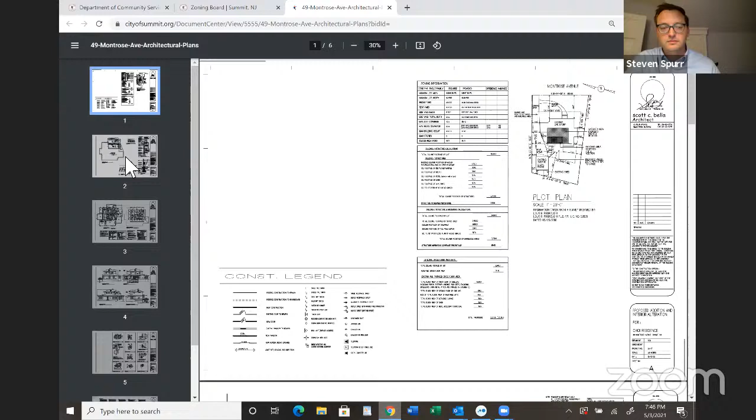So, Mr. Bella, if you want to take us through each of the floors and get an idea of what you're going to do to each one. Okay, so if you could move on to the next page, this is the crawl space and not much to speak about there.

Okay, so if you look at this page, what you see on the left-hand side is the first floor plan existing plus the proposed new. And if you look on the left side of the drawing, you'll see the 3 bedrooms, and they will remain intact. In the front of the building is the living room, and off to the right is the den.

And as you walk from the living room to the back area, that's where we're proposing to enlarge the kitchen and eating area. In addition to that, we would have a sliding glass door that would allow us to go out to a new wood deck in the back, again, for entertaining and outdoor eating in the yard.

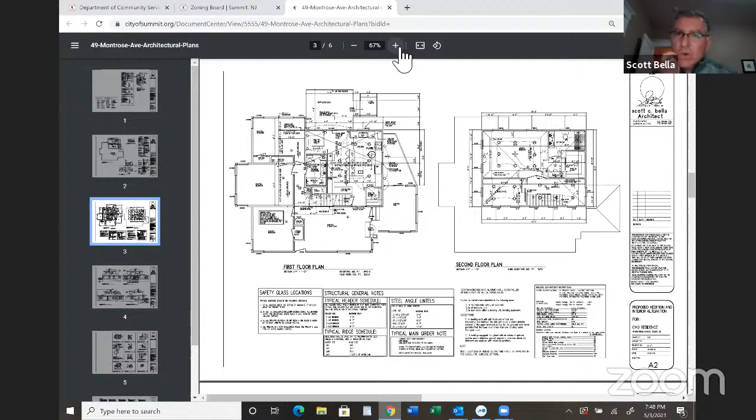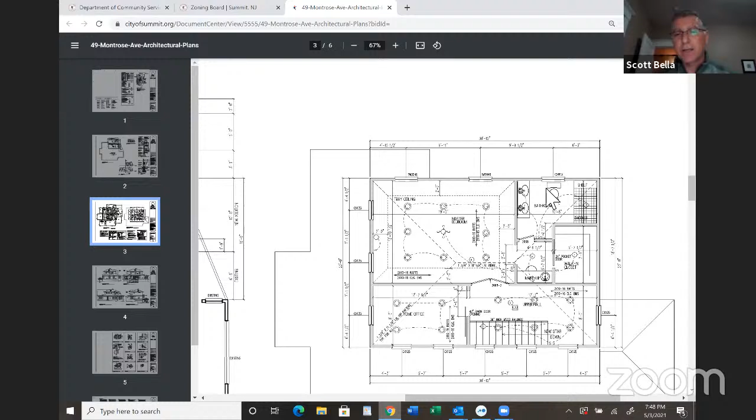If we could move to the right on the second floor, please. This second floor plan would allow us to come up over the existing downstairs basement stairs to a second floor upper hall, and then enter into the back left side of the dwelling into the master bedroom, which would house a full bathroom as well as an ample walk-in closet that would be shared.

And to the front of the floor plan is the home office, roughly around 8 by 12, a very modest office. But with technology today, everyone is much more compact. And basically, that is the second floor.

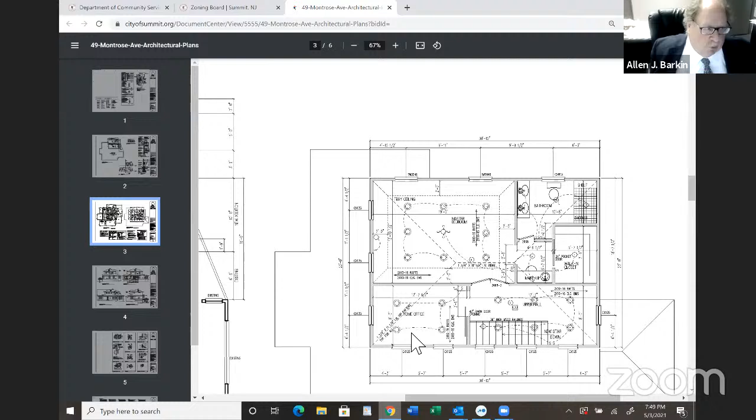So the thin lines outside the thicker lines represent the first floor. That is correct, yes, that's the roof line of the first floor. And the heavier lines represent the space you're developing on the second floor. Correct, proposed new walls.

So if we can scoot down to the next page, we can take a look at the elevations, and we can probably look at all of them at once. I think aesthetically we can see that. So if you look at the bottom left would be the front elevation. And you'll see for the most part throughout the building, except for one portion in the rear, we're working with all hip roofs, which slope up in all 4 directions, keeping in context not only with the neighborhood but more so with the current dwelling and roof line that exists. So aesthetically, we are looking to do those roof lines as well as horizontal siding, wood deck, everything you would see in a standard neighborhood these days.

Hey, there's background noise. It sounds like somebody has a TV on. Yeah, that's third in Cardinals history. Someone's watching the Cardinals on baseball. If you could just mute your microphone, that'd be helpful. Thank you. Third on that list, all right.

I think we solved it. All right, you can continue, Mr. Bella. Thank you. So yeah, that's the elevations that we're looking at here.

One of the things I wanted to briefly address was, I believe in the report, there was a comment or question about potentially going over the existing first floor in its entirety to bring the house more in context with the existing neighborhood. And the reason we didn't do that was twofold. One, we really don't need that much space, and proportionately we believe this works better in terms of overall proportion.

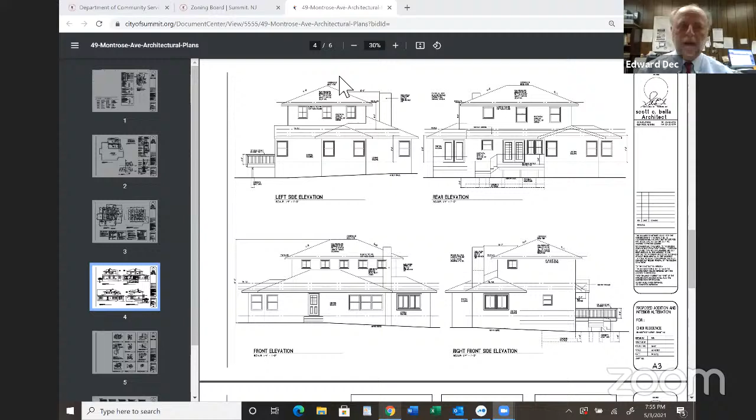Mr. Dec, if you'll take us through the site plan. Sure, want to put it up on the screen, it would be better. I don't know if you want me to share mine or should we go with what you have available to you? Chris, do you want to put up Mr. Dec's plan? Thank you. Okay, those are the architecturals, obviously. Yeah, that's the architectural. Yeah, we're going to go with the grading plan. Yes, thank you.

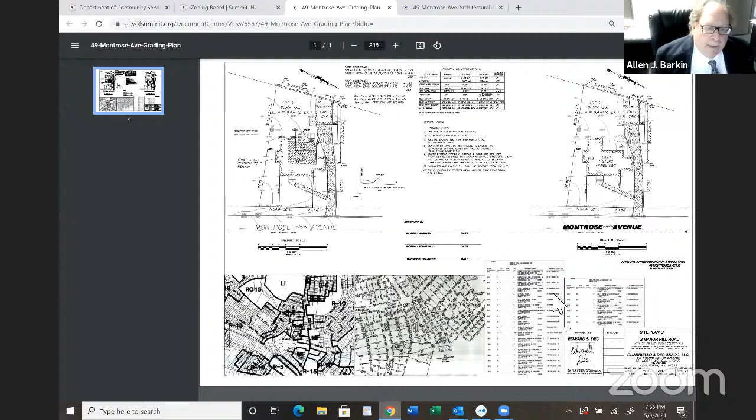That's it, terrific. Okay, the site itself is comprised of 9,470 square feet. We meet all of the bulk requirements within that zone as far as lot width, lot depth, and the front setback. Side yard setbacks are existing. We are not expanding in any direction, either to the left or to the right. All of our addition or expansion is, I would call, infill between the outer dimensions of the building itself. The overall lot itself has an existing driveway, which goes to the rear of the property, and at that point there's an existing garage.

The lot itself is primarily fairly flat. We have a cross slope of about 3 feet between the front left to the rear right of the property. We are not changing anything as far as grading goes. We do show proposed grades in the rear, although those match fairly closely to the existing grade. So there are going to be no major or any significant changes to the yard, the way it drains, and the area around the building will remain the same. Again, most of the work is on the inside portion of the building. We are proposing a wood deck towards the rear. And as Mr...

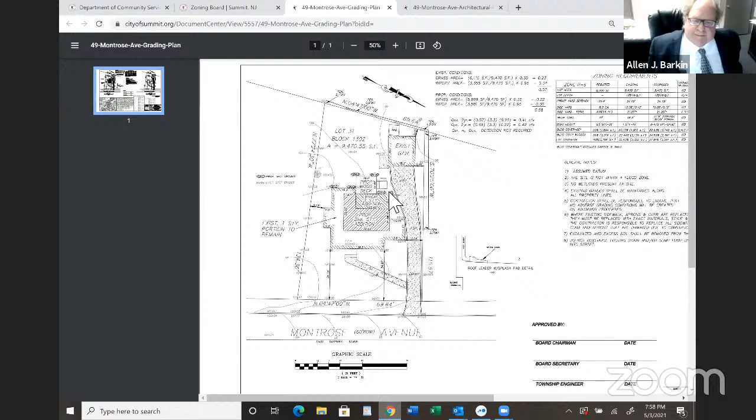Thank you, Mr. Dec. Mr. Dower, do you have any questions for Mr. Dec? The only question, well, we mentioned downspouts, which is kind of a standard comment, would be...

If there were air conditioning units and or if a generator is proposed, where would they be located? I think that would be best answered by Mr. Bella, but we would make sure that we maintain that 5-foot separation between the property line and those components. The downspouts will be directed towards the rear of the properties as opposed to the side.

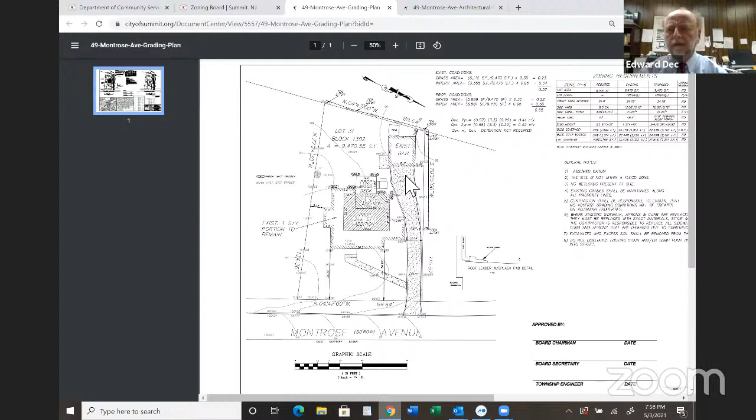Okay, thank you, no further questions. Just to build on that, Mr. Barkin, as we typically condition acceptance of the applications on acceptance of the engineering letter, and that captures all the points, Mr. Ball would include that in the resolution.

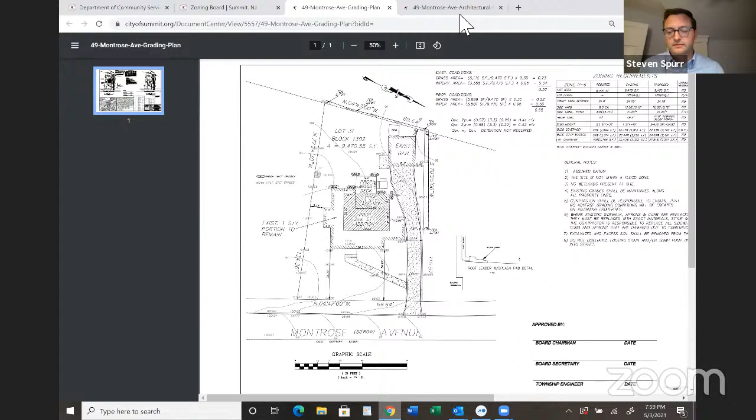Okay, Mr. Sneckis, anything for the engineer? No, thank you, Mr. Chairman. Okay, members of the board, any questions for the engineer, Mr. Dec? I just have one.

I'm not sure who's best to answer this, but the zoning officer notes the issue of that shed. If that was mentioned earlier in the hearing, I'm sorry I missed it, but are there any plans to do anything about the shed? Well, I was going to have my clients address that.

Okay, but generally speaking, they'd like to keep it, and that's what they're going for. As they'll testify, it was there when they bought the house, and subsequent to them buying the house, their neighbor to the rear, the only people who would be impacted, built a 6-foot fence, so they're not even seeing it anymore. So I'll have my clients address that.

Other questions from members of the board for this witness, the engineer? Seeing none. Any questions from members of the public for the engineer? Seeing and hearing none.

All right, Mr. Barkin, your next witness. I will call Hannah Choi.

Ms. Choi, if you could please raise your right hand. Do you swear or affirm that the testimony you're about to give in this matter is the truth, the whole truth, nothing but the truth? I do. Please state your name and spell your last name for the record. Hannah Choi, C-H-O-I.

Thank you, counsel, your witness. Ms. Choi, how long have you and Mr. Choi owned the home? I've lived in this house for 5 years. And you are looking to expand it by enlarging the kitchen and adding another bedroom, bath, and office on the second floor. Is that correct?

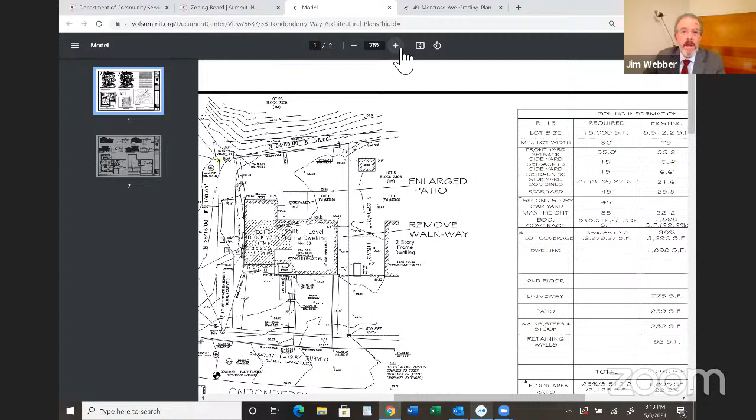The architect has prepared within the split level dwelling a dashed line, and that dashed line shows the 45-foot rear yard traversing the building, the side yard, and likewise the other side yard. But it is that 45-foot rear yard that poses the undue hardship and practical difficulty in improving this property.

What is proposed by the applicants is the construction of a master bedroom for this existing 3-bedroom house. That master bedroom is consistent with the north side of Summit and with the amenities that you would expect. It is a 672 square foot addition, entirely within the footprint of the existing building, and is shown in that dashed or hashed line.

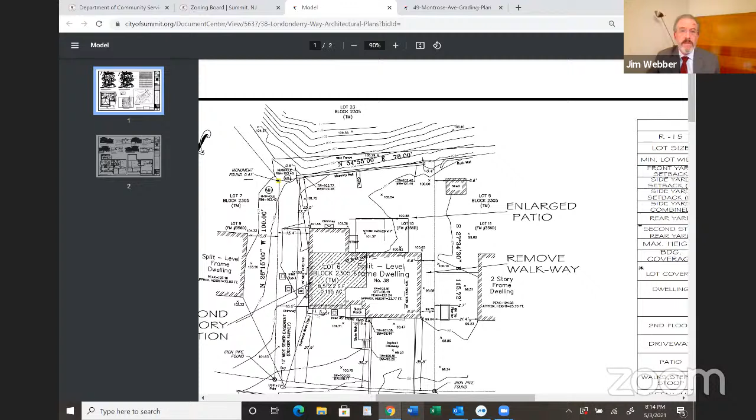As you can see, it does not extend over the back of the property. There's a 1-story wing of the property that is 25 feet from the rear lot line, and this addition does not extend over that. Instead, it stays over the main portion of the building.

The reports of Krista Anderson have indicated that there is a setback of 37.7 feet to the proposed 672 square foot master bedroom addition on the second floor, where 45 feet is required.

There's also a proposed patio. You can see the enlarged patio, designated with the arrow, consistent with the existing setback of the existing patio. But because of the size of the property and the proximity of the rear yard, you're only allowed to go in 10 feet from the 45, so you're allowed to go to 35 feet from the rear lot line. What is being proposed is a continuation of the existing setback of 24 feet, 26 feet to the end.

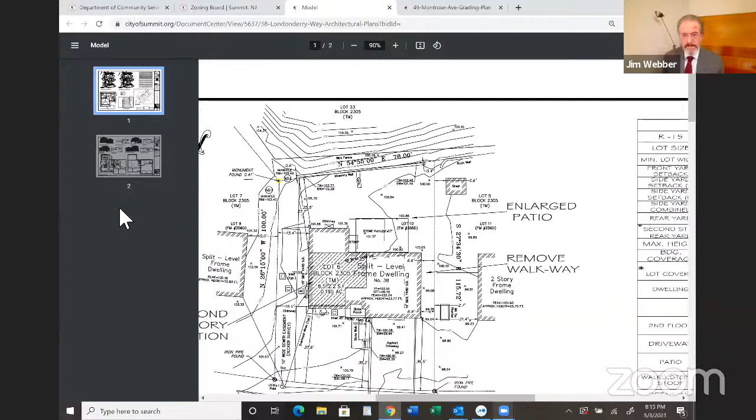There is also, Krista Anderson notes, if I can call to the next exhibit please, Mr. Nicola, prepared by the architect. Thank you. And we go down to the lower right-hand corner.

If we go into the floor plan, at the bottom of that design, on the right-hand side, we see the basement garage plan. The basement garage plan has a breezeway proposed along the back of the property, an attractive design, and also has a bump out. That bump out intruded on the garage space, creating a variance condition. That bump out is going to be eliminated, and as a result, the request for the variance associated with the bump out has been eliminated.

Because of the small size of the lot, the lot coverage is going to be expanded. We thought it was only going to be expanded 71 square feet. However, Krista Anderson's review and calculations show it's being expanded 128 square feet. Mr. Dewar, in his report, had indicated that when it was 71 square feet, it was de minimis and no stormwater management plan was required. I asked him, and he will advise the board whether the 128 square feet net increase in lot coverage has changed his mind and whether it remains de minimis. He has indicated that it remains de minimis.

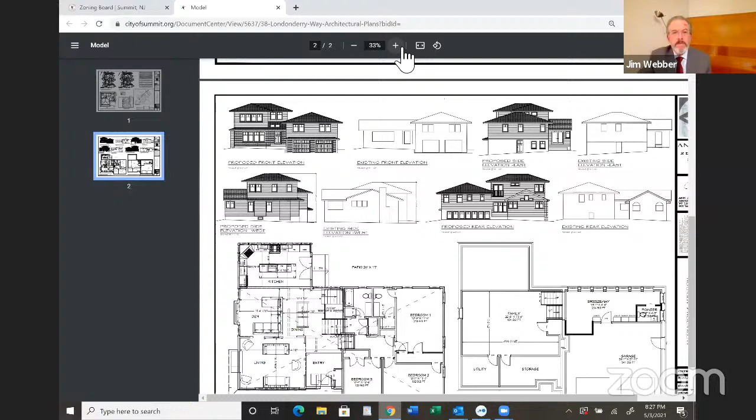So when you're talking about that, you're talking about the upper left-hand corner of the plans you prepared for the proposed front elevation, and you're talking about articulation that you've achieved by the setback of the addition, assuring that it doesn't sit flat on the face but does have that setback. Correct. And so it adds a little more architectural detail to the massing.

And one of the points that was particularly of note was in the lower right-hand corner of your elevations, the proposed rear elevation, and there you show a breezeway. Now, that breezeway is the row of windows, that's correct, on the left-hand side, and that's behind the garage. Is that correct? Correct.

And then the garage doors, and now we're looking again at the proposed front elevation, you're showing these to be more of an architectural interest. Is that correct? Correct. And in talking with the Voras, would you make the representation to the board that the home the board sees will be constructed substantially similar to that which is shown.

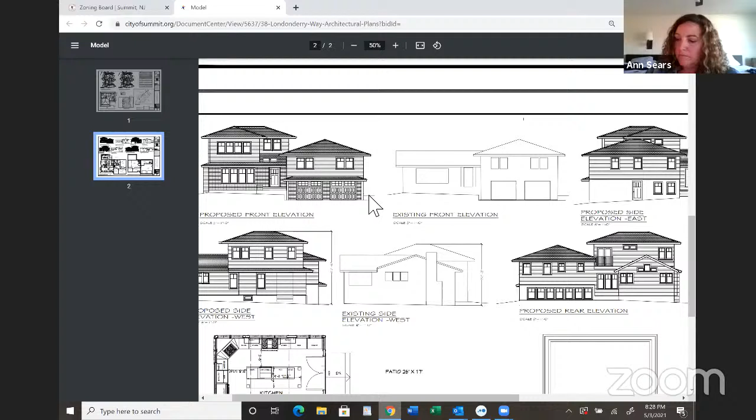And so that has to be clarified, Ms. Sears, that in fact we're going to have the level of architectural detail that we're seeing here. Correct. We were talking about the elevations, and I wanted to point out the creativity that you had in dealing with the split level home.

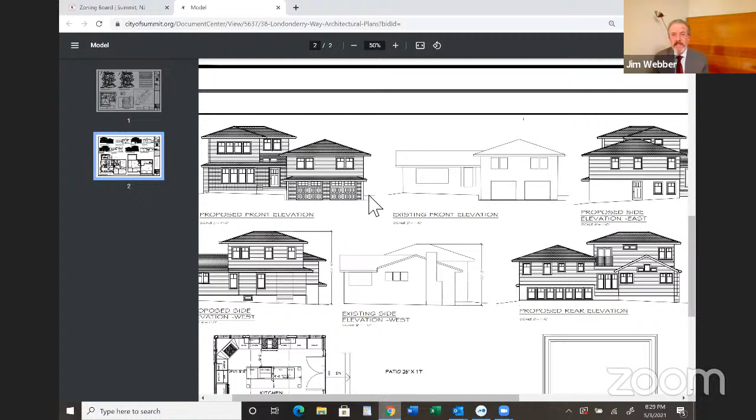In terms of the proposed master suite, where is that? Is that on the first page, I believe? It is, it's on the first sheet. And is that shown in the lower left-hand corner? It is, in the lower left-hand corner.

Correct. So, Chris, if we could scroll down there, thank you. And this is the extent of the additional area that's being constructed with this home. Is that correct? Correct, this is the new addition.

And to walk you through it, in a split level we have stairs, so we'll be coming up the stairs and landing in a hallway. One of the features they've added, because they do appreciate the arboretum in the backyard, is they wanted doors they could open, with no balcony. It would just be doors opening to view and enjoy the arboretum in the backyard.

Coming into the master suite, they have a modest size master bedroom with all of the features. It's not overly large, just the right size for the scale of the addition. The closet too is a nice walk-in closet size, but it's not anything outlandish for the neighborhood, just a modest walk-in closet and a decent sized master bedroom area, all consistent with what the neighborhood carries.

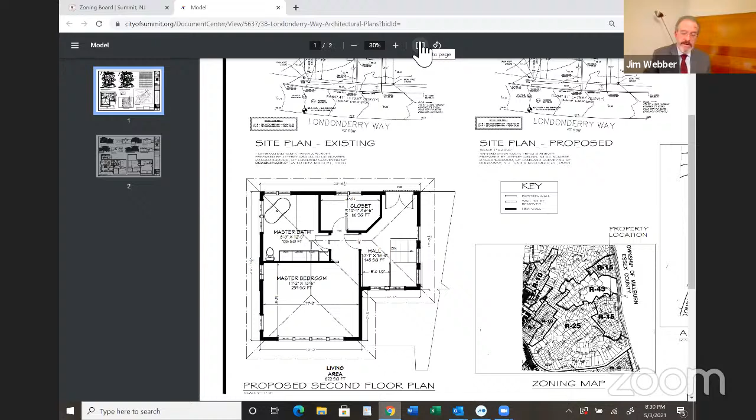I had indicated we were eliminating the one variance with regard to the garage in order to avoid that variance, eliminating that bump out. Is that your representation to the board as well? Yes, it is. Prior to even seeing Krista's latest comments, we had removed that bump out in the garage area and straightened that wall to go directly across.

Have you also had an opportunity to review the administrative reports of the board professionals? I have. One report was from the Environmental Commission, asking that consideration be given to using permeable pavers, solar power, and the use of native plants during construction. On behalf of the Voras, can you agree to that as a condition of approval? I would say that's consistent with what their plan is, yes.

And then I'm just pausing to remember Mr. Dour's comments. One dealt with the storm sewer, that there would be confirmation and examination of the adequacy of the inlets at that point. You didn't have any comments with regard to that, did you, as an architect? No, I think that could be followed up with engineering, but I think they're existing and seem to be in working order as far as my inspection.

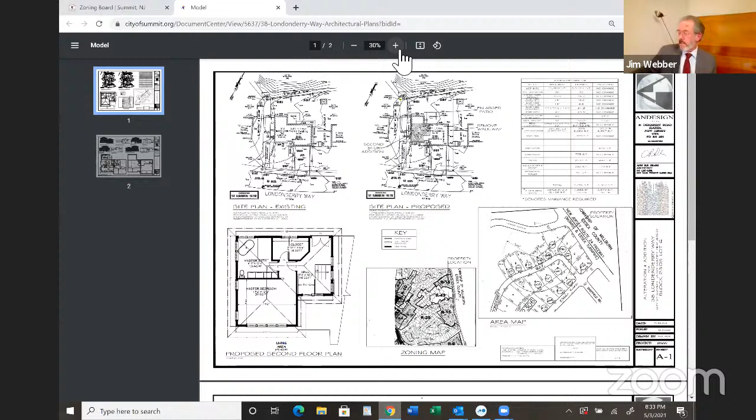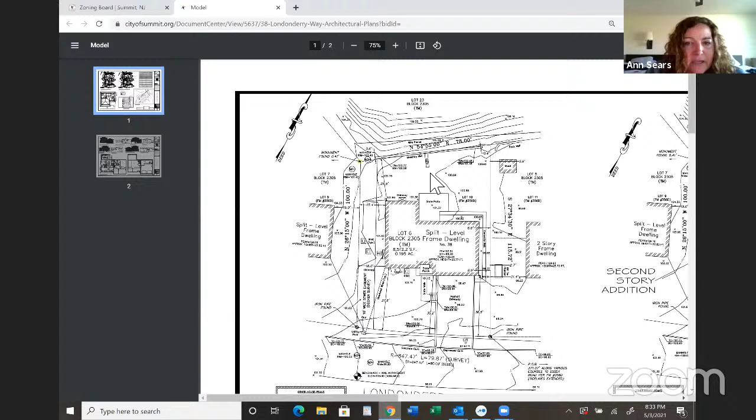And then with regard to the air conditioning and generator units on the side, right now I believe if we look at the site plan existing, they show 6. He has asked how far setback is the air conditioning condenser from that sideline. Can you advise the board as to the distance? Yes, I would say it's 11 feet from the side yard right now. I could pull it up if you want a clearer answer.

We can ask whether Mr. Dour and the board find your representation of 11 feet acceptable without needing to spend more time on it. The representation will be made, Mr. Chairman and members of the board, that if the Voras do install a generator, it will be consistent with the ordinance of the city of Summit. Would the board accept the estimate as to the distance from Ms. Sears? If so, I would have no further questions and would submit Ms. Sears to the questioning of the board.

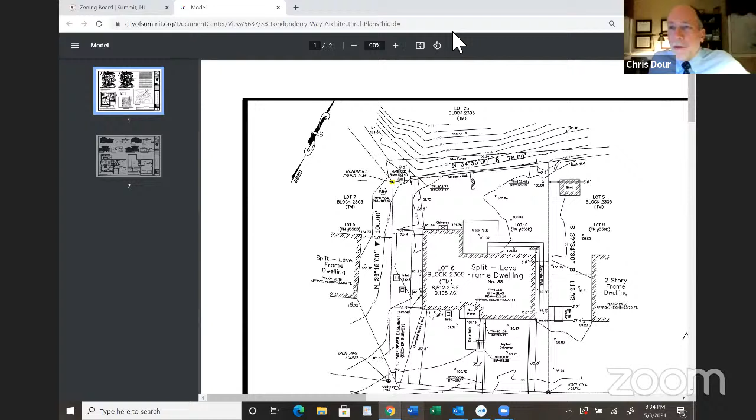I have no questions, though I'll hand it over to Dour to correct me if I'm in error. I think Mr. Webber's covered everything and I have no further questions.

Mr. Sneckis, any questions for the architect? Regarding the breezeway that's proposed, is it a portion of the garage as it exists today? As it exists today, it's actually not part of the garage. There's a wall currently that runs across the face. I think the prior owners maybe had a photography studio or wood shop in there, but it was finished. There are walls, it is not just unfinished space. So it's currently finished and you're just calling it the breezeway, and that's also contributing to the FAR. Correct.

No further questions. Any questions from members of the board? Searching and seeing none. Any questions from members of the public for this witness?

Seeing none. Mr. Webber, any further witnesses for you? Nothing further, Mr. Chair. I would submit the application for the approval of the board.

I'll scan once more for public comment on the application. Hearing and seeing none. Mr. Ball, what conditions do we have attached to this application? The only one noted is compliance with all the conditions in the engineer's report.

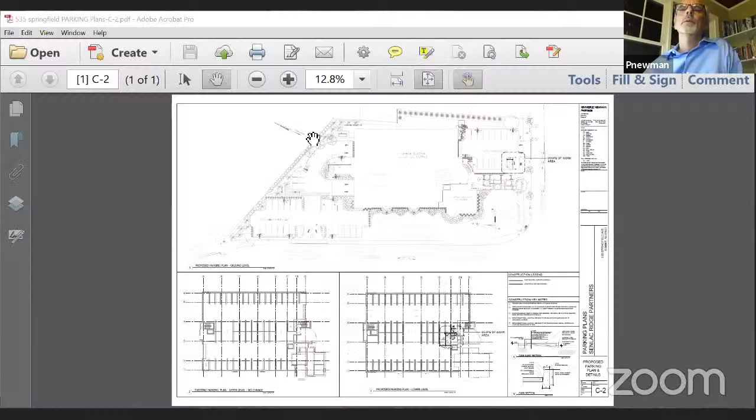Can everybody see that? Yes. Okay, great, let me get it leveled off. Enlarge it just a little bit here.

So overall on the site plan you see right here, this is actually Springfield Avenue, with the police station right across the street. That's the traffic light at the corner, and Morris Avenue is over here.

The condition we specifically looked at was when you go into this small visitor parking lot in the front area. Immediately adjacent to that, there's a steep set of stairs that goes up to the main atrium entryway. Then there's a long sort of ramped set of steps going up in this area—it's not a ramp, it's more a matter of long landings and single individual steps.

In addition, there's a very complex back and forth ramp that winds around this whole area. That's because the pitch from this area up to the landing level of the atrium is quite high, requiring a fairly lengthy run in the 1 to 12 range for ramping.

The problem has always been that if someone pulls in and occupies this ADA spot, there's a striped area immediately adjacent where they can offload and go up a small ramp. At that point, they have a choice: they can go up this ramp, which is quite long and lengthy, and in inclement weather or icy conditions, presents some hazardous conditions.

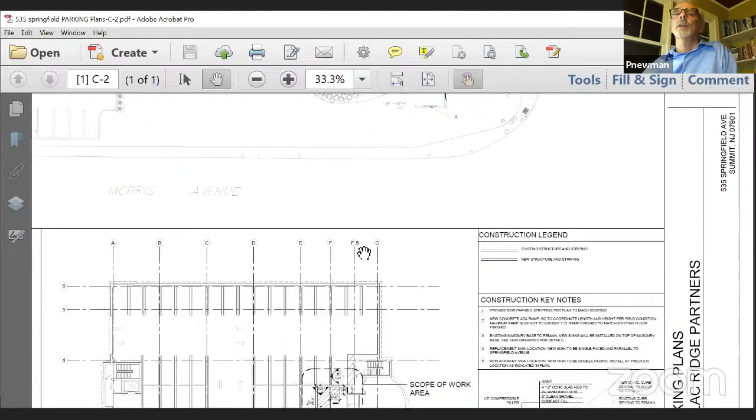So what we suggested was to eliminate that spot outside, which we consider somewhat hazardous and not at all ADA friendly, and bring a second spot down to this level. Just so you're aware, there are 2 levels to this parking lot, a lower level and an upper level.

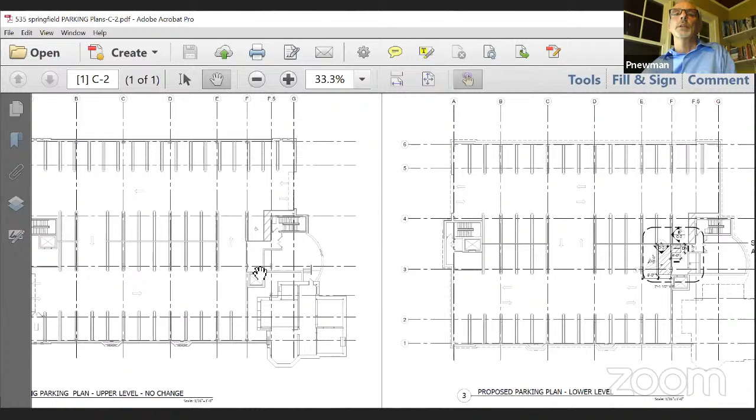So each one has ADA spots. At this level, there's an ADA spot, same thing. You can get off, go right into the elevator, and go right to the main lobby. We're saying on this level, we're going to add a second parking spot, so there will be 2 spots at this location.

Now, what we're proposing is not to eliminate any spots, but simply to take one spot and stripe it, and the other spot becomes the ADA spot. Then on the exterior, reverse it, making these two regular spots at this point. So someone parking here can go up into the building.

We consider this much safer. Oh, sorry, you were going to ask a question?

Mr. Newman, based on your experience and knowledge of ADA requirements, is this a significantly improved ADA accessibility plan? It is.

It actually makes it much easier for someone to get into the building and still brings them to the front door, which is one of the crucial components of ADA - to not make someone feel like a second-class citizen, but to make them feel just as important as anybody else coming into the building. This will enhance their experience and make it safer.

So that's what we're proposing to do on the parking. As an architect, Mr. Newman, can you offer an opinion on what impact the removal of the handicapped access ramp and area has on the aesthetic and integrity of the architecture of the building?

It'll actually greatly improve the aesthetics of the building. This whole area out in front has a very complicated set of railings that run around it, naturally because it's required, and that makes this a very complicated, unattractive looking entry to the building. I remember the first time I saw the building, and when I first got involved with it, I was surprised they had created this ramp, making it so complicated.

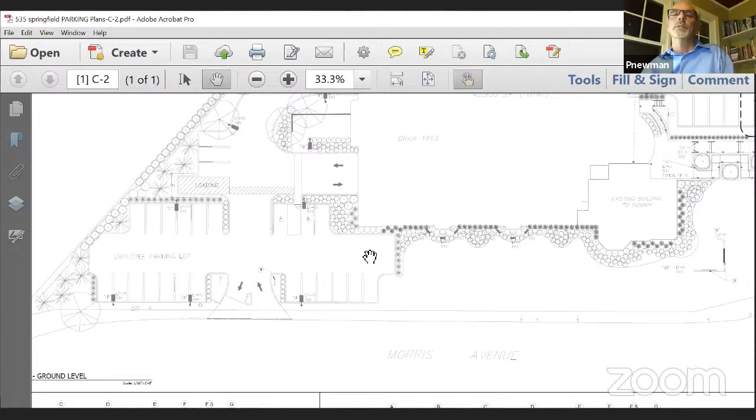Mr. Newman, before you leave, I'd like to go through the administrative reviews that pertain to your area of discipline and ask you to confirm that the parking count remains at 138 total spaces with 5 ADA spaces. That is correct, it's staying exactly the same, we're just relocating the spots.

And it is your testimony that the handicapped access plan complies with all applicable regulations? It does. Can you confirm that there is no additional on-site lighting proposed by this modification? No, there are no modifications proposed for any of the lighting on site.

All of the rest of the engineering comments can be carried as conditions of approval, correct? Yes, where every other comment is fine.

All right, and then moving to the planner's review. I ask you whether or not in preparing for your testimony, preparing for your commission and your design, did you review the previous plans approved by the Board of Adjustment in 2007? I did, yes. And do they in fact confirm approval of 3 freestanding signs? Yes, they did have 3 signs on the final approved plan. Mr. Chairman, I have no further questions of this witness and would submit him to the examination of the board.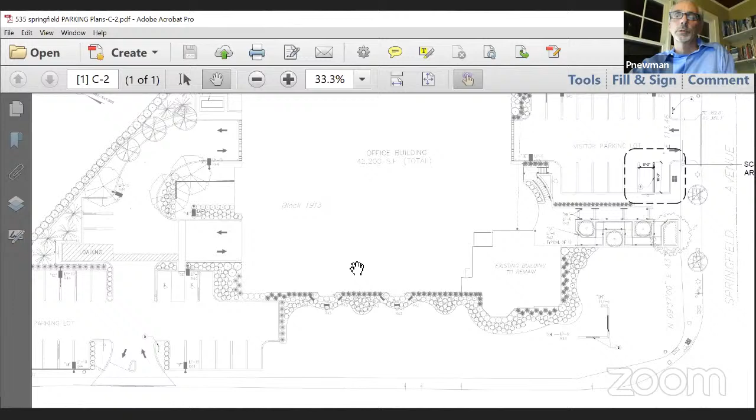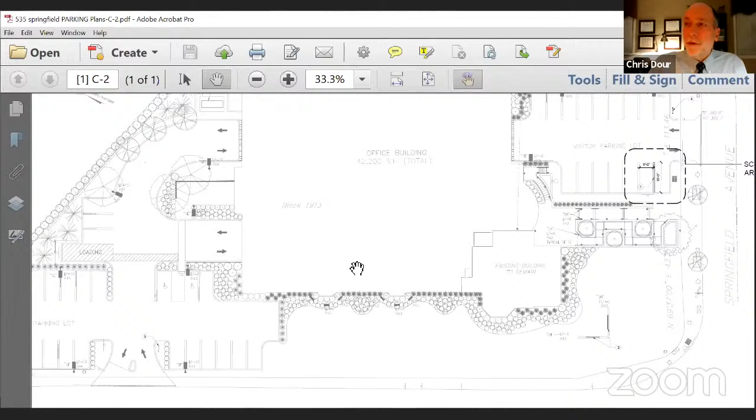I also thought about whether there could be some change in the traffic flow so that the upper level would mirror the lower level. But I do see an advantage on the upper level to having the access lane right alongside the elevator, in the event someone would want to double park there temporarily to drop somebody off so they have access. So given that overriding design, I think it should remain.

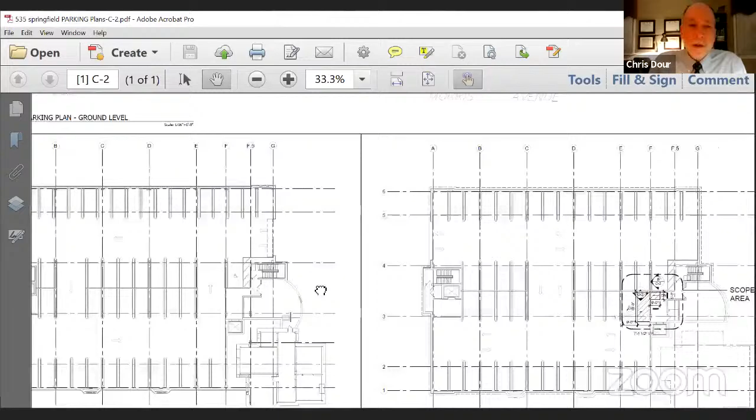I tend to agree that this is probably the best thing that can happen as far as the proposed design, and the elimination of that parking space, the ADA ramp in the front is, I think, a long time coming. So I have no further questions.

Thank you. Okay, thank you, Mr. Dour. Any questions from members of the board for this witness? I see Claire's raising her hand. Claire, go for it. Sorry, trying to unmute myself in the wrong spot.

I appreciate the intent with the ADA. I'm no expert here, but I did have some questions about it. You said you had consulted with some specialists. Could you expand on some of that?

Sure. I've been around since the New Jersey barrier-free code. We've always been very cognizant of this, working closely with many code officials and building departments in New Jersey over many years, narrowing down what is the proper ADA spaces. I did my research on this building and my observations over many years. I've been in this building and in tenants on it for many years, watching the conditions and how people drive in and out, et cetera.

What I did was take my interpretations to the Department of Community Affairs, the overriding licensing group for the New Jersey Building Code. They have folks there you can talk to and explain what you're proposing to do, to check that my interpretation is as correct as it can be. They were actually in agreement with me, and were surprised when I showed them the condition of where this spot had been put, and where it had initially been located.

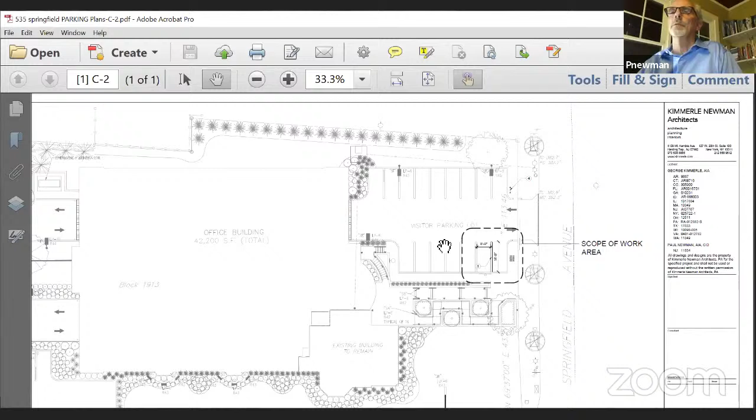And you spoke about how moving the spot gives direct access to the front door of the building. I haven't been in the building since 2008, so...

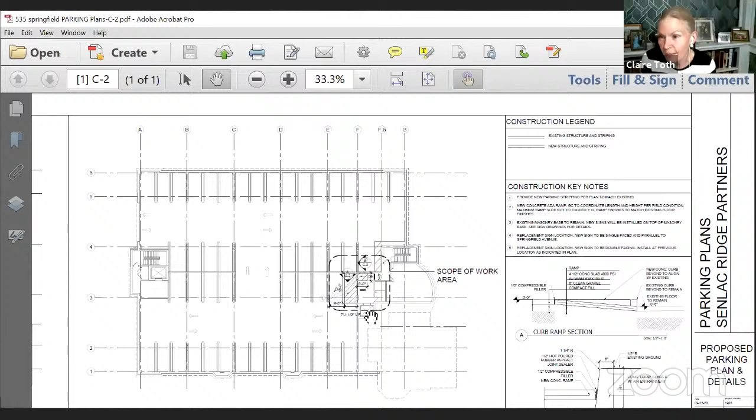I'll tell you where I'm really going with this: here's our hypothetical. A group of 3 or 4 employees want to walk to Winberry's for lunch without using cars, and one of them's in a wheelchair. How is this working?

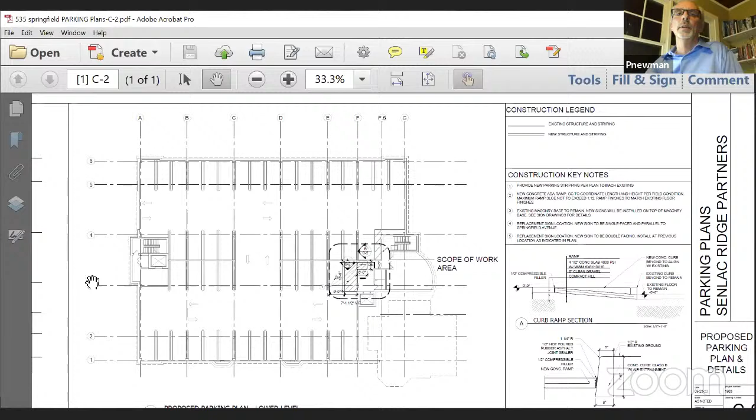What they'll do is come down here to the elevator, get into an open protected area that's curved, a platform area. Then they can move out here on an ADA path, and go up through this area, along this driveway out to the sidewalk. Or they could come down the rear entry point from the elevator and come out in that area, also reaching the sidewalk on that side.

But it seemed like quite a ramp up from the parking garage. It's actually not - the grade change from here to here is very, very minor. Just the grade change from here to the entry point up here is almost twice as much. You can see all the steps that go up there.

That was one of the things that really struck me - wow, this is almost flat from here to here, which is why people would want to go that way, versus this, which is quite an endurathon to get to the top. If you just walk up that ramp, by the time you get to the top, you're like, wow, that was a long way to go because of all the winding lanes on it. No, I agree.

It's not particularly the best solution, but I'm with you on not wanting anybody to feel like a second-class citizen. That's a big part of it, right?

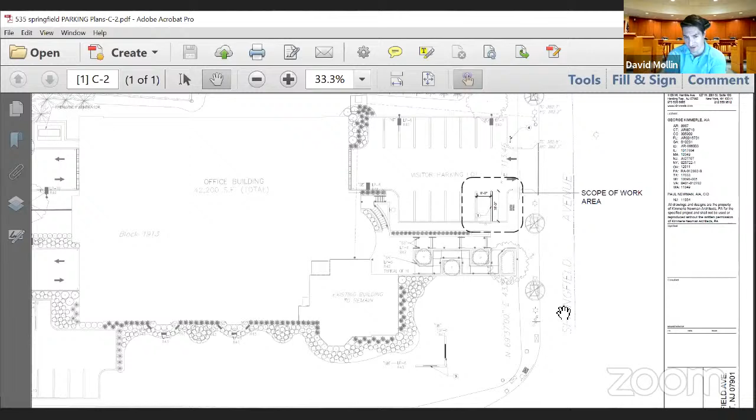I just wanted to follow up on the hypothetical. In that situation, the party comes through the garage along a path. Do they have to roll through the parking lot? No, they can come out and go right around here, get onto the sidewalk, and walk along this whole front area. Let's say someone comes out, starts heading over, and realizes, wait a minute, where do I go? It's confusing for people right now, whereas this new design will be very clear and easy, and it'll make sense for them.

That's the designated visitor parking lot. So if a disabled visitor were to come into the Springfield Avenue entrance, would there be signage indicating where accessible parking is located? Yes, we're proposing something right by the garage entry point that tells people to go in right there and park immediately upon entering. A small directional sign. I don't know if we need a condition about the location being acceptable to the code official, but that would be acceptable to the applicant, Mr. Chairman.

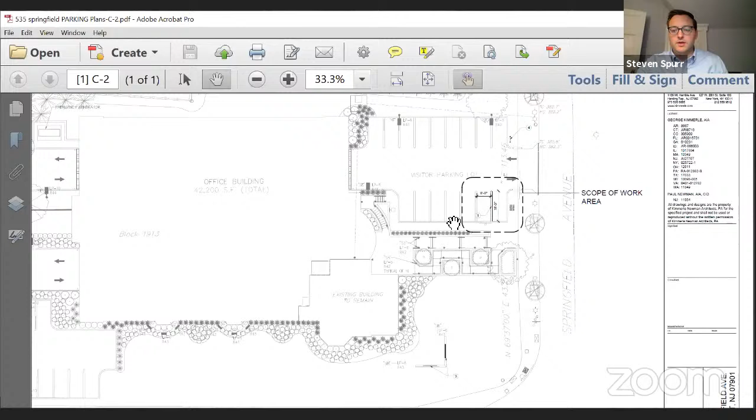Great, thank you. Any other questions from members of the board for this witness? Hearing and seeing none, Mr. Sheehan, if you'd like to proceed to your next witness.

Thank you. I would ask that the testimony of Christopher Adams be given in this matter, and that he be admitted to the platform to be sworn for that purpose. Mr. Adams, do you swear or affirm that the testimony you're about to give in this matter is the truth, the whole truth, and nothing but the truth? I do. Please state your name and spell your last name.

My name is Chris Adams, last name A-D-A-M-S. I'm the owner/partner of Adams Ahern Sign Solutions, 26 years now in Greater Hartford, and prior to that I spent 10 years in a previous sign company. So I've basically got 35 years in the sign industry. My focus has been on wayfinding and institutional properties like hospitals, corporate office parks, and a lot of college campuses, that sort of thing.

Roughly for the board's edification, Mr. Adams, how many commercial office buildings have you been involved with over your time in business? It'd be very hard to count. For 2 or 3 of our major clients, sometimes there's 15 or 20 buildings as part of their office parks. A couple of those clients, I don't know how well known they'll be in New Jersey, but in Greater Hartford, Greater Boston, Greater New York: KS Partners is one, New Boston Partners is another, and certainly Normandy Real Estate Partners, associated with this application. We did 13 of their office buildings in Westchester, inside and out, interior signage planning, bringing to boards, bringing up to ADA standards, and we continue to work with all of them.

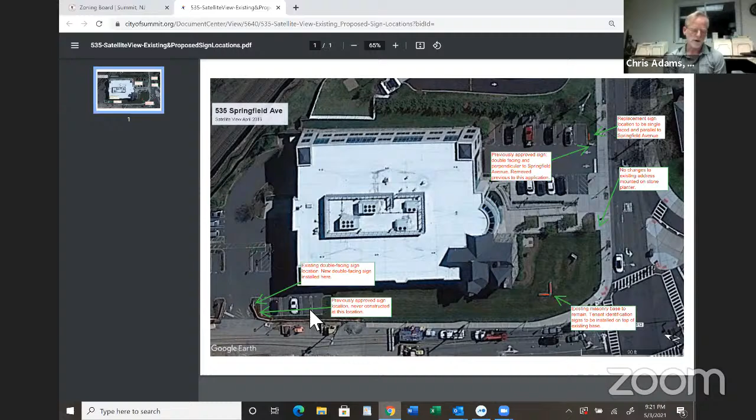And with regard to the sign on the north side entrance on Morris Avenue, the original third freestanding sign shown on the original 2007 site plan of Keller and Kirkpatrick, which was the subject of the approval, was removed when the driveway was flared to accommodate the teardrop requiring a right-turn-only exiting from that driveway, correct? Yes, that is correct. And you are replacing that with a sign proposed to be set back 20 plus feet as opposed to the original location, which was approximately 14 feet and change. That's correct. Both original approvals were for signs approximately 14 feet from the curb, and on this Morris Avenue frontage, the sign will be 20 feet 6 inches from the curb.

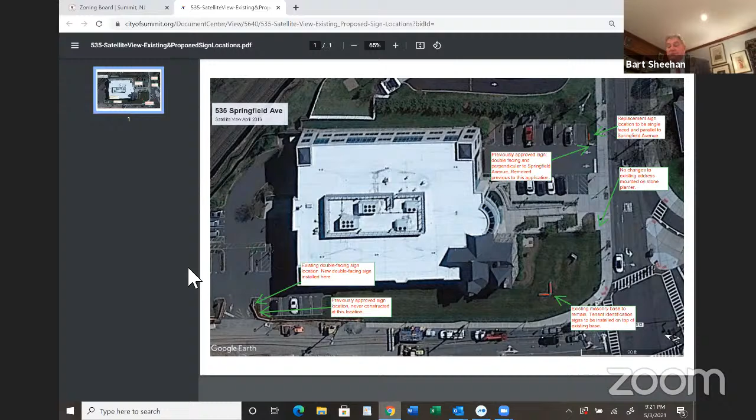All right, let's ask the secretary, or ask you, to share your screen with your drawing of L201, the landscaping and signage layout plan.

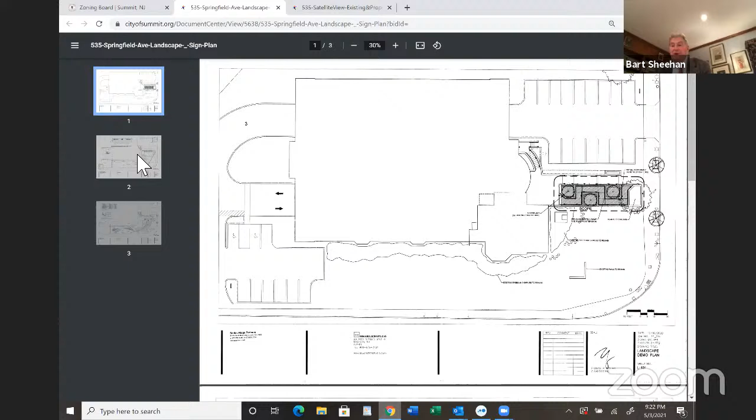All right, thank you, Mr. Nicola. Now, Mr. Adams, having summarized the existing conditions, please take us through the specifics of the proposed signs, beginning first with the entrance signage on Springfield Avenue in the easterly corner of the property.

Okay, I will. I wonder first, do we want to look at what the sign looks like? Which is on the, I believe, the second page of this landscaping plan, or the third. It's one of those two. There we go, thank you.

So the signs we're talking about now are the one that says street front sign, 535 Springfield Avenue. They are 36 inches wide and 4 feet high. They have a base that references the freestanding main sign, and then they have actual signage with graphics above a reveal that has the lettering stating the address.

Now, on that location at the easterly area, that sign - possibly by an abundance of caution, but I felt it was wiser, given the extreme short distance between the curb and the parking lot where the first car parks, that the sign couldn't be set back far enough to have a decent clear view. Given the way it mimics the rest of the sign designs, it was wiser to turn it so it was parallel to the street. I realize that gives it a little less visibility to a car that might want to turn in, although it is still visible.

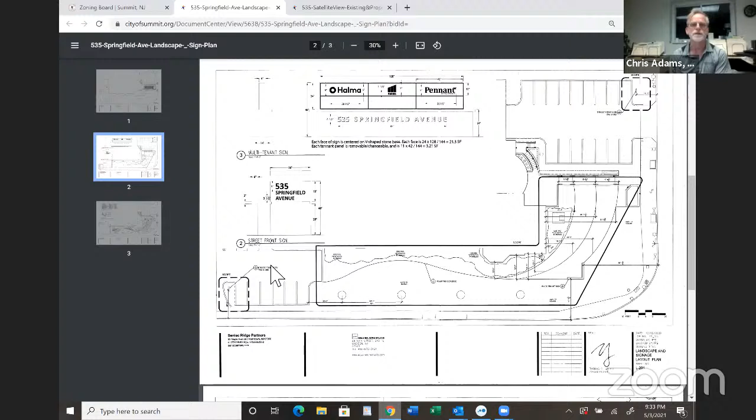Better said. All right, now, finally, the Historic Preservation Commission, making no note of the substantial aesthetic benefit derived with respect to the historic structure from the removal of the handicapped access ramp, asks the question that it is not clear what the elevations of the new signage is. Are not the elevations with dimensions clearly identified on drawing L201? Oh, I believe they are. I'm not quite sure what was meant by that. Probably, maybe it was that there's no illustrated mock-up of what the sign looks like in its environment. I really don't know, but certainly I did believe that this drawing that was part of the landscaping submittal shows what the sign is supposed to look like and what its sizes are.

In scale. Right, I have no further questions of this witness, Mr. Chairman. Would submit him to the examination of the board, the experts, and the members of the interested public. Thank you, Mr. Sheehan. Mr. Dour, any questions for this witness? No questions, Mr. Chairman. Mr. Schnickis, any questions for this witness? Yes, Mr. Chairman, just a few.

With regard to, you addressed a number of our questions, but yet with regard to the illumination of the, I think you call them street front signs, which are just the address, are they going to be illuminated, or they're just going to be freestanding, no illumination? No, there's no illumination on those signs.

Will the letters themselves be somewhat reflective to light? Well, they could be, because there is black reflective vinyl that could be used, and if that was a desire, I would certainly be able to do that. But the way they're designed right now is that the brushed aluminum is the background color and black is the text color, and using the more bold font that we're using there, I believe that'll be high enough contrast.

But I'm quite sure that neither me nor my client would have a problem with going with reflective. I will say one thing though: black reflective isn't black, it will show up white, which means sometimes it can actually limit the contrast in that dusk period of time. Interesting. Because then you have basically a white-looking letter on a light-colored background.

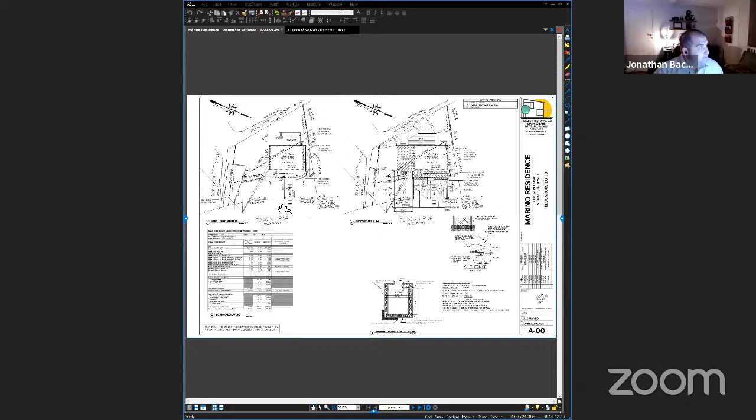Yes. So I'm going to zoom in on the existing plan. The proposed project is an addition and renovation of an existing 1.5 story home in the R5 zone. The existing lot is a fairly irregular shape, but it does meet the required lot dimensions with a width of 86.99 feet, where 50 feet is required. The lot size is 6,144 square feet, where 5,000 is required. The lot also has a gentle slope from the rear yard towards about where the existing front porch and proposed front porch is, where it shifts to a strong slope down to the road.

You can also see that on the existing site, the setback cuts across the back corner of the house quite a bit, as well as the right side. The front and rear setbacks don't even intersect with the left side because the shape is so peculiar. There's a few items that are going to be removed from the site, including a rear wood deck, a sidewalk to the backyard, and also an asphalt driveway in the front left corner that doesn't lead to a garage - it's just a parking space.

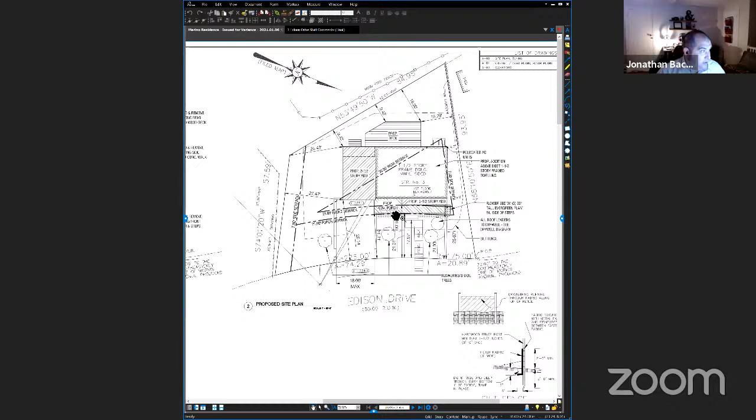I'd like to note though that roughly 50% of the proposed building addition is comprised of this front covered porch and the rear deck. If those were removed from the project, the actual building would be within 1% of what is allowable on site.

The proposed building has a FAR of 40.22%, where the existing is 26.27 and 35 is required. The proposed site development is in conformity with the required impervious coverage requirements, with 38.44%, where 30.66 is existing and 45% is the maximum allowed.

I also have two comments about the report issued today with the staff comments. One addressed the existing front walk, which we left to show existing as it was going to the street from the front porch. We are in full agreement that this should be redesigned and directed towards the proposed driveway, so that circulation would be made easier. The second comment is that a PE will be hired by the clients to develop the site engineering.

We started this project roughly a year ago, and at the time, every PE that I know of and that the owners could find were so busy we couldn't get anyone to work on it. I'm familiar with the engineering side of it, so I was able to get it this far, but we will hire a PE to develop the topographic survey, which I believe will address a number of questions.

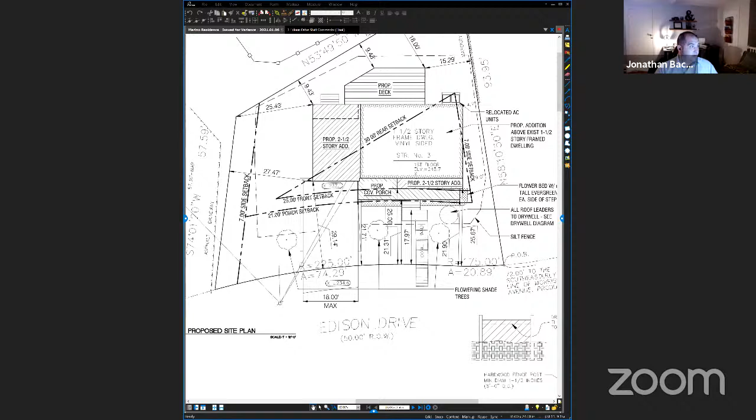Mr. Dour, you want to jump in there?

Yeah, I know the city does not like the grates on top. It would give that desired effect as an overflow, but they're concerned about it being a mosquito issue. So I would have to say no, but there's an option that they could do an overflow with a pop-up emitter. We've done that on a number of other applications. We just don't want to have the overflow directed to the street and have an icing condition. So I think the city will work with their engineer to come up with a solution that could include that pop-up emitter or some other options.

Okay. Just my question for you, Mr. Dour, or the architect - would that require us to condition this approval on a review of the stormwater management plan, or is this just a minor element of it that they, as the applicant, should be able to address?

I think it can be conditioned that the applicant will work with the city engineer's office to come up with a final design for the seepage pit installation.

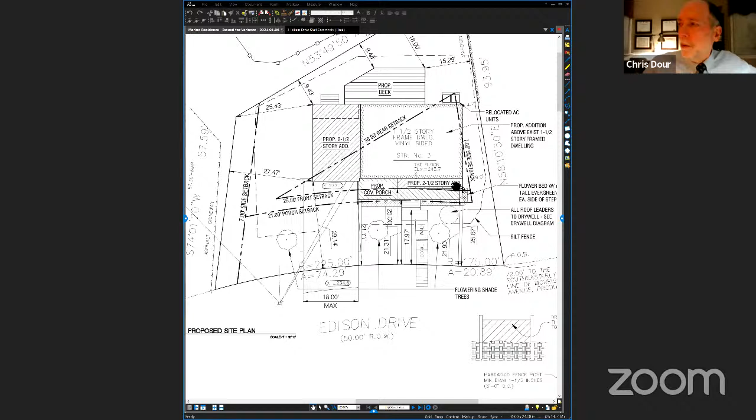The only other question I had, if we're going to go through the report, was the setback from the AC units and noting if a generator is proposed. And then removal of the retaining wall by the old driveway. Yes, the retaining wall will be removed, and there's no generator.

AC units are as shown on there, but the setback, is that going to be compliant with the ordinance? The note I read said there's a proposed ordinance likely to be passed by the time this goes to permits, that it would be 5 feet, which would meet that requirement. The current requirement is 10 feet, which doesn't meet it. If it doesn't pass or isn't ready by then, we would propose an alternate location.

Okay, then I have no further questions, Mr. Chairman.

So I'm just noting as conditions the acceptance of the engineer's letter and the coordinated design of the seepage pits. Andy's probably got a better phraseology than that. Yeah, okay, I see him smiling. So yeah, absolutely.

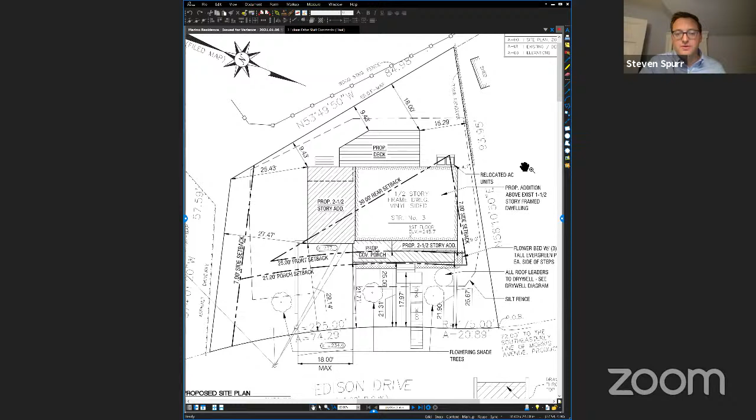Any questions, Mr. Snickis, for the architect here? Just one question regarding the overall setback variances being requested. They seem largely connected to the configuration of the property. Correct, the irregularity of the shape of the lot and also the way the existing home is situated.

The biggest part of the addition is the desire to have a garage and bring that into more conformity with what's in the neighborhood. And because of the way the house is situated, a side yard addition actually creates a rear yard setback problem.

Nothing further, Mr. Chairman. All right, thank you. Any questions from members of the board for this witness? I do, believing that he's the only witness, so let's grill him.

Mr. Steiner: I think it's more to Mr. Dour, and the question is they've provided no engineering testimony at all. Are we comfortable that all the items we would normally have asked an engineer have been covered in the architect's report and your review of the process, that this will not cause any problems for neighbors, the city, or any other interested folks?

I think they've indicated they're going to direct all the roof leaders to the seepage pit. The seepage pit design calculations are there, and they're adequate. It's really just the design of the overflow question that came up before, and then the location, 10 feet minimum from the house. That's so you don't have water seeping back into the foundation, and also any proximity to the property line so you don't cause a problem for neighboring properties.